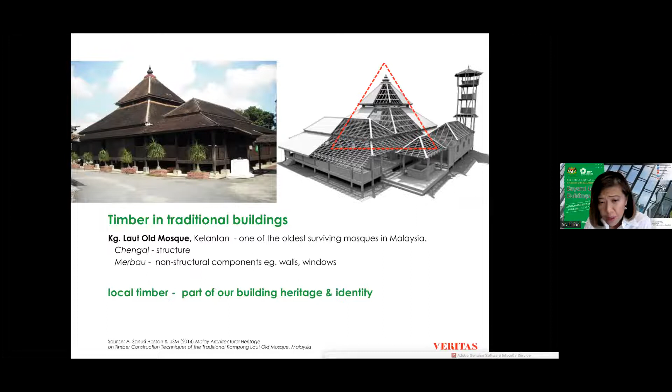So I do believe, and we all know, that local timber is very much part of our building heritage, something we're all very familiar with. We remember those timber walls, those timber louvers that we grew up with, and it's so much part of our identity and heritage.

So continuing the journey, I would like to share some of our own learning from, as I think Najwa said, my 30 plus years of practice in Malaysia, and where it has led us today, some of the issues that I believe need to be addressed, and there's potential to hopefully work with everyone, top down, bottom up, to be able to do more towards combating climate change. I would like to start with some very early buildings, I suppose, to show that it's not really new, but perhaps it's only now that we are more consciously quantifying what we call green buildings.

In early 1999, we had the opportunity to be part of the building of Putrajaya. It was a very exciting time in the late 1990s, and we had a chance to build the temporary bus and taxi terminal, which I show because it's a building that hardly consumes any energy at all. It's totally a simple shelter that is very much connected to the outdoors and yet sheltered from the elements.

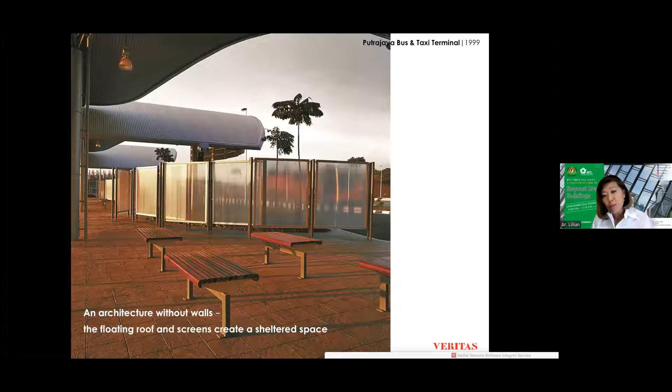So this is the very sort of basic of sustainable building design, where we have an architecture without walls, and we rely on the natural climate around us to provide the comfort and the shelter. Here is just a simple building with floating roofs and a lot of rain screens to deal with what is a very challenging aspect of our climate. It's not just the heat, but it's sheltering from our seasonal heavy rains. That is a big challenge to how we design for the tropical climate.

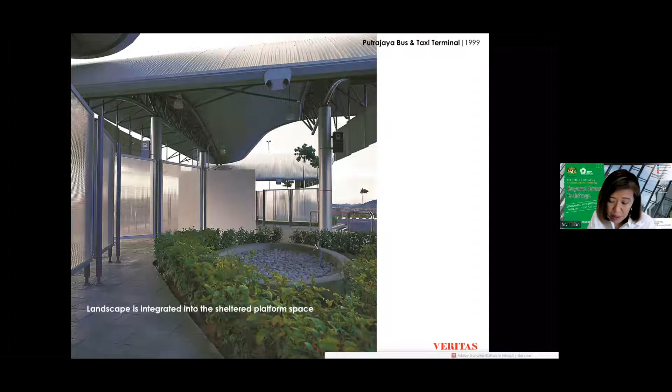And even in a bus station building, way back then, 30 years ago, we aspired to already bring the landscape into the space, a space that you normally associate with the hustle and bustle of a station. We also went on to build the Western Transport Terminal, which today is known as Putrajaya Sentral, where the KLIA Express goes through. And we worked again trying to ensure that it is a naturally ventilated building. So the whole complex actually is naturally ventilated. Only the internalized edifices are air conditioned.

So it's very early on that it's almost intuitive to build without a reliance on air conditioning, because in the tropics, we really do not need to keep the interior enclosed and protected from the outdoors. So we must be very well aware that there is actually no need to have a closed environment in most of our spaces, particularly in public buildings.

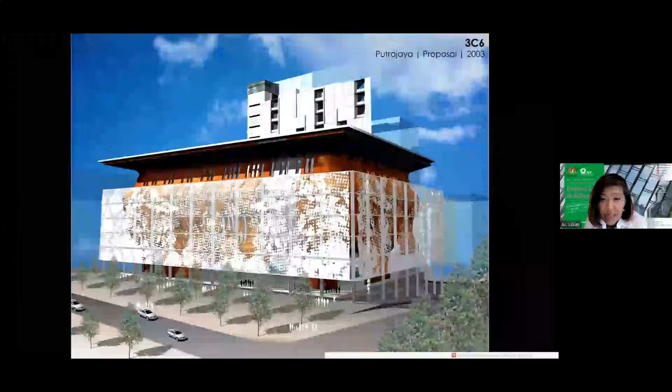Okay, I wanted to show this project that never happened because it was one of the earliest buildings that we tried very much to celebrate the use of local timber. This is an office building with some commercial retail in the core island of Putrajaya. We never had a chance to build it, unfortunately. I wish we did. But right then we already tried to celebrate one of the very precious and valuable resources that we have, which is tropical timber.

In Putrajaya, you're all aware that they have very strict urban design guidelines that require you to build arcades around buildings to allow people to walk in a sheltered arcade from building to building. And we wanted to embed in those standard urban design something that will make that connection to our culture or cultural traditions, local materials. So this was a scheme that we envisioned would have a layer of timber on the facade, on the podium facade,

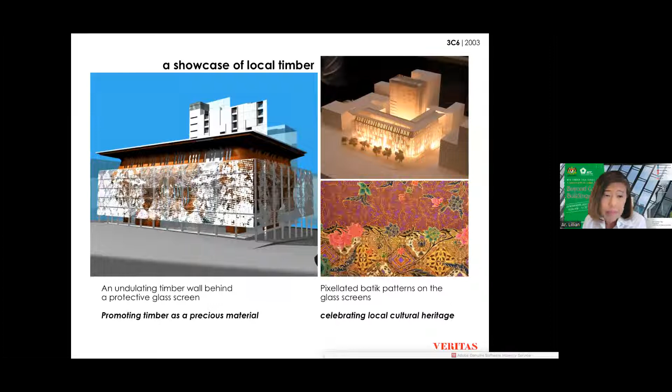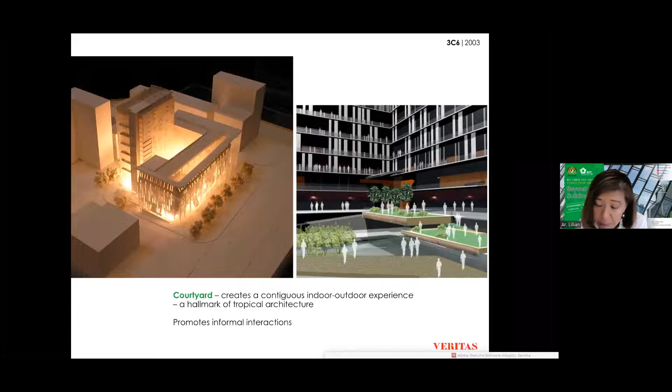but in front of it there is a fritted glass screen. It's a pixelated pattern that we derived from typical batik motifs. So when you're further away, you see the motif very clear. Of course, the screen helps to shelter the arcade from the rain and provides some amount of protection also from the sun. Unfortunately, we didn't have a chance to build it. And I'm still looking for an opportunity one day to have something like that, because this was on the main Core Island Boulevard, which we thought was an appropriate place to celebrate batik, which is one of our very precious craft traditions.

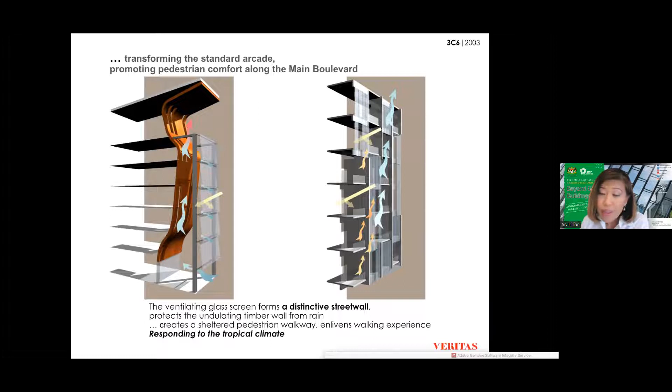Okay, this is how it could work. A layer of timber on the inner part. We were well aware that timber deteriorates with exposure to moisture and to rain. So the glass screen is placed so as to protect the timber and increase its longevity, so it would be accepted as a good outdoor or semi-outdoor building material. I can tell you it's very, very difficult to convince a client to put timber on the outdoors, because we've been trying since then, and there are only a few buildings that we have successfully done that.

Okay, so one of them, to the credit of our clients at Putrajaya, is the Ministry of Natural Resources. And it being the Ministry of Natural Resources, naturally we wanted to use natural materials that are sourced locally. So we were very determined to be able to showcase some of the very viable building materials that have been underutilized, underappreciated, or maybe even feared to be used. So we started by at least trying to bring it onto the podium level as movable screens around the podium of the building.

Most of our work in Putrajaya has an intention to try to make the city more walkable. Putrajaya was conceived as a garden city, and of course, we probably had hoped that we would be walking more around in Putrajaya. And that's why the urban design guidelines have very strict and very extensive requirements for providing pedestrian ways around buildings. But we felt that there were issues of scale that make it more difficult for a person to walk around because the blocks were large.

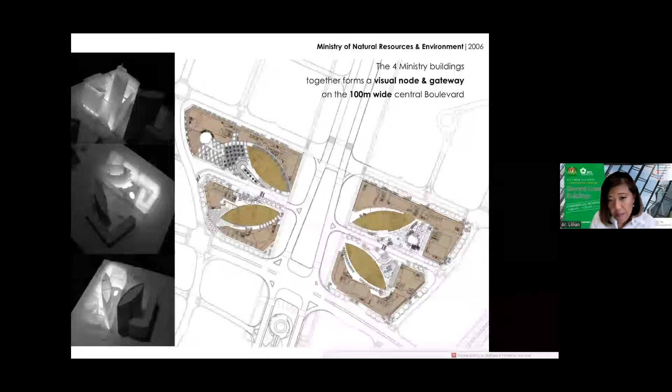a lot more walkable. So we proposed it, and the client took the initiative to extend that concept to the buildings around it so that you create a whole precinct that's quite walkable between all these ministry buildings. So all the buildings, even though done by other architects, followed this master plan concept of carving an indoor street to facilitate the people in the buildings to walk a lot more to other buildings around it.

And we also externalize all the corridors which would otherwise be in the office space, and that usually amounts to 10%. We sort of externalize them out so that there is a lot of activity around the atrium that is created by the indoor street. So you will find this condition in the few ministry buildings that are clustered around in Precinct 4.

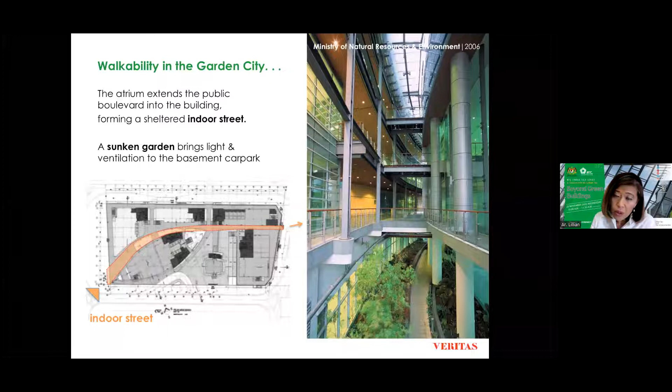And this building was actually completed in around 2003, I recall, 2004 maybe, or 2006, yeah. So you will find that you will be walking through indoor streets, which are also landscaped, in all the 4 buildings in that cluster.

Even back then, in the year 2001, when we worked on the design, we were already doing analysis of the sun shading, tracing the movement of the sun, and looking at the thermal performance of the building envelope to start to quantify the building to ensure that it is energy efficient. And at that time, we had a lot less software, and it was really not easy to do, but we were able to make a start on calculating the BEI of buildings even back then. That's 20 years ago.

And the buildings in this cluster, all 4 of them, actually have a very good energy performance from the orientation of the building and from the treatment of the facade. And we had actually calculated that the energy consumption, the BEI as we know it more familiarly today, is around 136 kilowatt hours per meter square per year, which at that time we considered quite good. Of course, today the buildings that we can achieve are half of that, which is an amazing step from over 20 years ago.

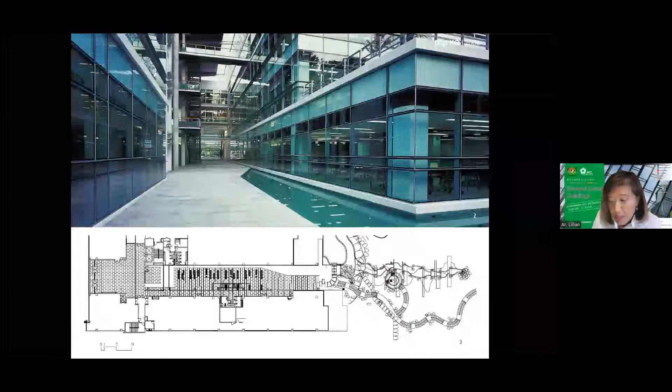It was a bit harder to achieve that in the other building because, being government civil servants, they were probably less inclined to indulge in what the younger people at Digi did. They actually built a cafe around there, and the space was highly utilized for informal interactions. We also took the opportunity, as you can see, to again use local timber selectively, as always, on the underside of the main atrium to give it warmth.

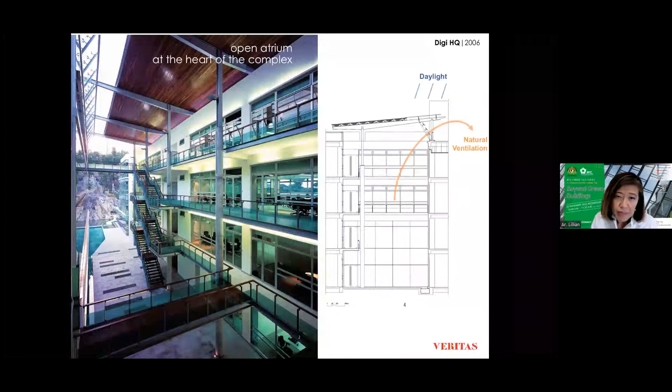So timber is really an amazing building material. And while it is very costly and harder to use as a structural element, it lends so much to a building in terms of giving it life and warmth. And people naturally gravitate to places that have that warmth and welcoming feel. These pictures we took without anybody in it, but usually it's quite filled with people, as you can see. And again, this is a naturally ventilated space.

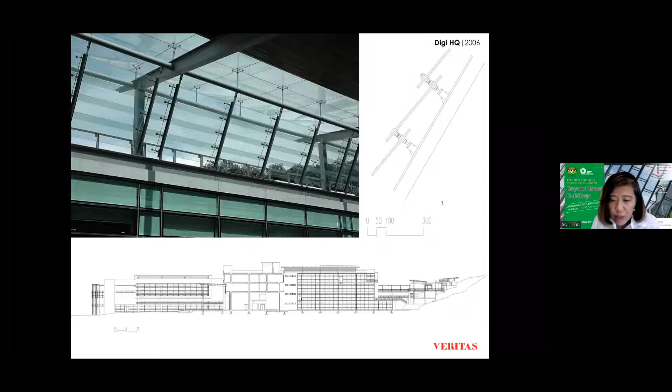I mean, they have all the air-conditioned space, but people actually like to be in the naturally ventilated space. So all the basic ingredients that we need to do sustainable buildings are actually there. It's just a matter of getting out of that mindset that you have to enclose a building, something that we probably inherited from the West or the North, and something that we should always try to steer away from with respect to our local climate.

This is a building that we did also around that time, completed in 2006. It's a typical corporate office building, and unlike Digi, we don't know who's going to stay in there even when it's finished. It's actually at KL Sentral. But again, we tried to use timber on the building facade, and this is what we were able to achieve. We were able to put up a timber sunshade screen that goes up about 30 stories of this 35-story building, excluding the podium.

So we were quite happy that we had a client who, I wouldn't say took a risk, but who dared to do something different from the norm. Again, we are well aware that applying timber on a tall building, it would be even more exposed to the natural elements, the rain and the sun. So we took care to ensure that the timber will be protected.

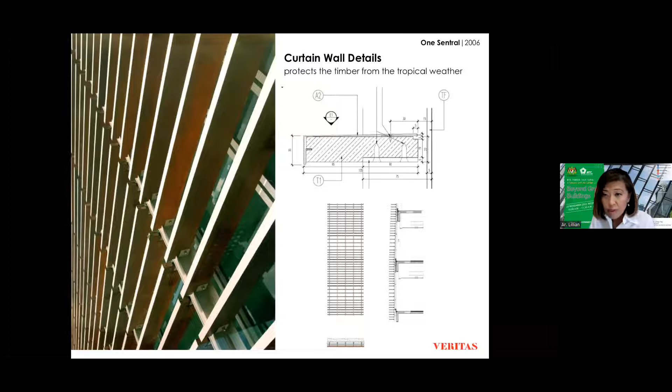So I do believe we were able to successfully achieve the utilization of local Malaysian timber on a high-rise building. That was something we really wanted to do, and we thank our clients at MRCB then for supporting our effort.

This was one client that believed in the informal and perhaps unplanned meeting of people and meeting of minds, what he called the bump factor. His gauge of the building was to ensure the people who work in this company would have a lot of opportunity to bump into each other and be able to talk informally and come up with great ideas in these unplanned interactions.

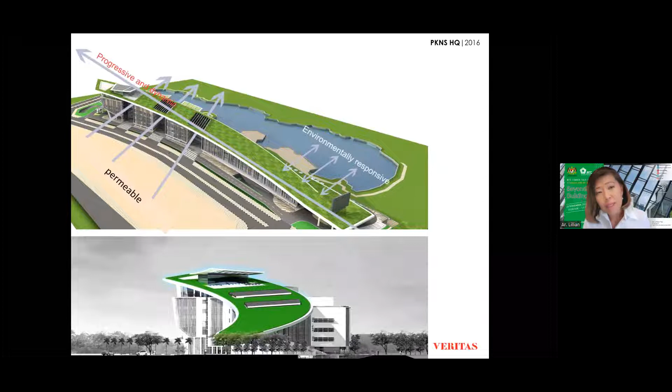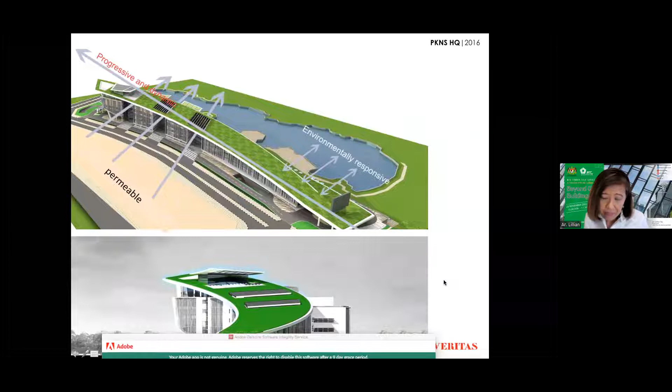but a low-rise building that hugged the ground and actually aspired to replenish its own footprint and to create a park to make up for that loss of green area from its own footprint. As it turned out, part of it then was converted to PV cells, but the total area we consider a good replacement of the footprint that the building occupied. So that's the part that climbs up the building, and then the addition of the PV cells.

Okay, that's how the park looks like. And the other aspect which we felt was very important, besides the numbers, was that we wanted the building to maintain the continuity of the urban pathways from the city to the left side back to the lake, so that people in the city can still filter through the building, and the building is not a barrier to people enjoying the green area, the public green area beyond the building.

2012, we did this building, which is Menara Binjai, again, another opportunity to test another aspect of a green building design. We actually started the building before the GBI was created. So we had actually started with the Green Mark, the Singapore Green Mark by the Singapore BCA. And when the GBI came up, we then also applied for it at the same time. The building is certified Green Mark Gold, but only GBI certified.

And we understand that because the criteria are different, the Green Mark being with a greater emphasis on energy, low energy performance criteria, and less on other factors. So it being quite an efficient energy building scored higher, but perhaps in GBI, there are a lot more areas that you need to score the points literally. So it scored a little bit less. And this is something that you will see, the difference in different ratings. Nevertheless, it's still a very good performance of 150 kilowatt hour per meter square per year.

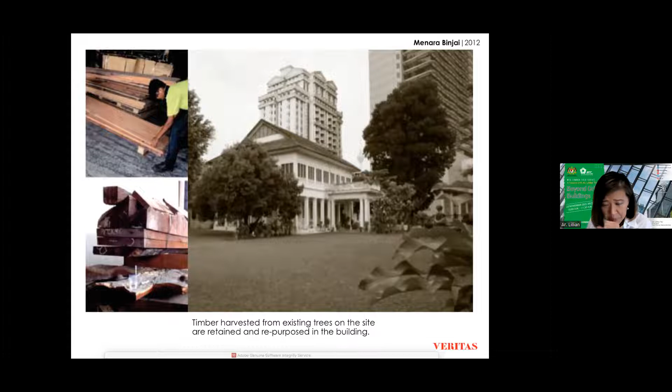Oh, I forgot to mention that this building was actually built on the site of an old colonial bungalow, and we had actually kept all the trees. We actually kept the trees for about 3 years before we were ready to put them on the building. The contractor was about to charge us a rental because he said this had been sitting here in his warehouse for a long time. But the client luckily was also committed to it. So we salvaged every tree that was on the premises and used them as much as we can in the building. Of course, it's not enough to do what we did in the earlier building, but we used them internally. Also, it was a species we were a little less familiar with. I think it was some African species that were planted there long ago. So we used most of it in a sheltered area, in the lift cars and in the main reception lobby, and some of it in the sunshade fins that are on the roof garden.

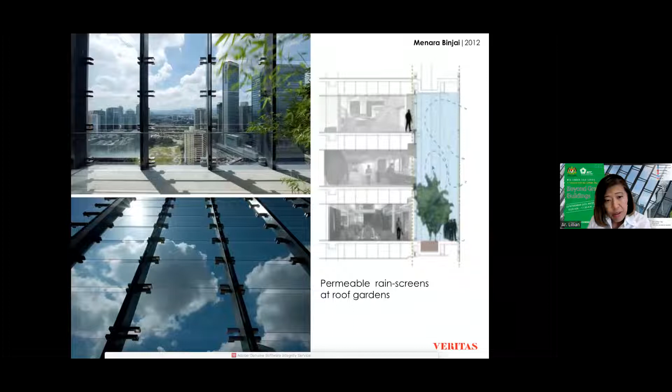Here's a view of what it's like behind the permeable breathable wall that we created on every 3 floors where the verandas are. This is one of them where the tenant even took the effort to put in a timber deck to make it feel a little bit more outdoors. And this is the urban veranda, we call it, which is the roof garden that can actually be utilized by anyone in the building.

So this is our way to just lend a bit of the life that we can have living in a tropical environment, and not to be in a fully closed building. You know, I spent quite a few years living and working in New York, where everything is so enclosed. So to me, it's very special that we have the privilege, if we took it, to create outdoor spaces to relieve the sort of closed hermetic office environment.

Another building that we had done, which also is GBI Gold and Green re-rated, is the Menara Etika in Jalan Bangsar. Here, while we were not able to bring the garden up the building, we were at least able to use it to relieve the typical dreary podium facade.

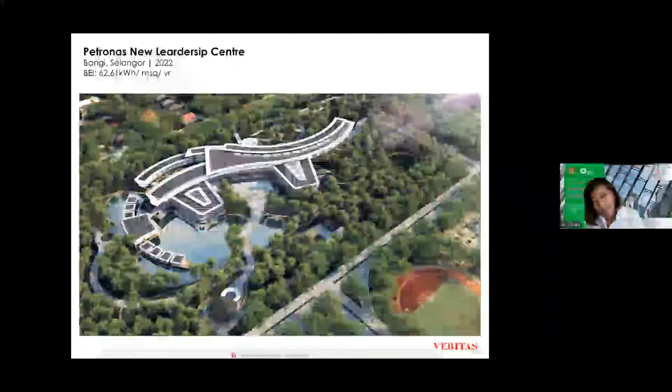Another building that we just recently completed, which is LEED Platinum and GBI Platinum, has the lowest that we've achieved, which is around 62, and that's without counting the PV cells. With the PV cells, it actually can achieve around 57 kilowatt hour per meter square per year, which is quite a stretch from where we started 15, 20 years ago. So that's the buildings that are rated green.

But you will find that most architects may not be able to have clients who want to go for rating, and you wouldn't be able to quantify so accurately your performance of the building. And there are many such buildings, but we believe that one should still strive to achieve some amount of sustainable performance, albeit not quantified and certified.

This is the Star Residence, which is 3 towers in KLCC. But besides the building, which is quite standard already, and we know what to do on selecting the glass and orienting the building, our attention in the city center turned to what we feel is another equally important aspect of sustainable design: the relationship of the building to the street, and to do its part to improve the quality of the sidewalks, the quality of the street, and in doing so, to encourage more people to walk and facilitate the walkability that we need so much in our city center,

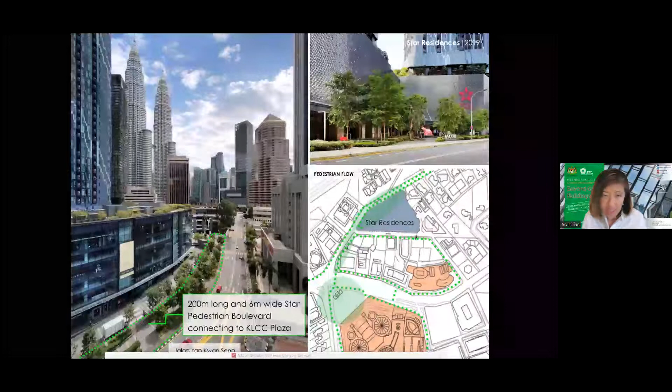Because it's actually not that far. I have walked this many times because I have often got out of my car. Our office used to be at the corner of Jalan Ampang. I have many times got out of my car and walked the rest of the way because it takes only 10 minutes actually to walk from Jalan Tun Razak to Jalan Ampang along this stretch. But it's something that people tend not to do because of the hazards that you may face in the sidewalk as it is now. But hopefully, within the next 10 years, as other buildings develop, the whole sidewalk environment will be much improved.

And to me, this is quite important, that every team of architects and engineers, when they see the chance, not have this island thinking, because sustainability cannot be an island all within the building, but needs to extend and be more holistic, to engage the streets, to engage the entire urban public realm, to make our cities more livable and more walkable.

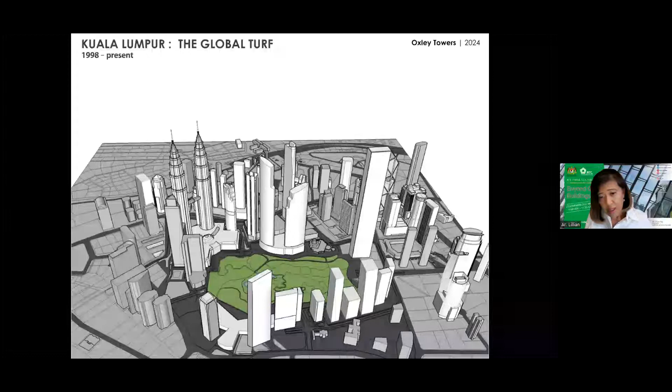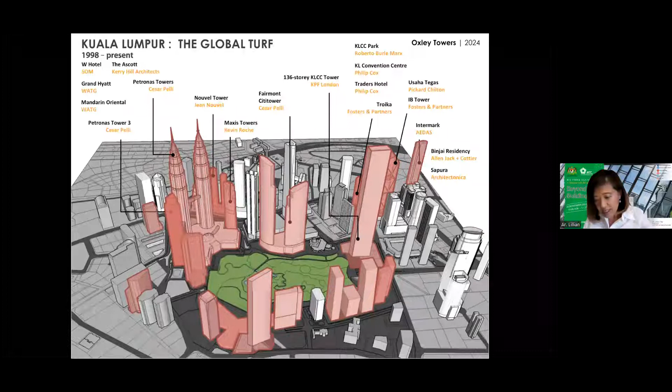But we never had a chance really to build in this place for a long time. I always like to show this because it is really hard to have an opportunity to build here. You've got Petronas Towers and all these famous architects from all over the world. Cesar Pelli, Norman Foster, SOM, everybody has been here, Philip Cox, AEDAS. So we were wondering when we'd get a chance, because it's actually right at the front door of our office, which is across the road. But one day, after 20 years of looking at it, we had the opportunity to have a client with the good faith to engage us to do a building here, surrounded by all these international architects.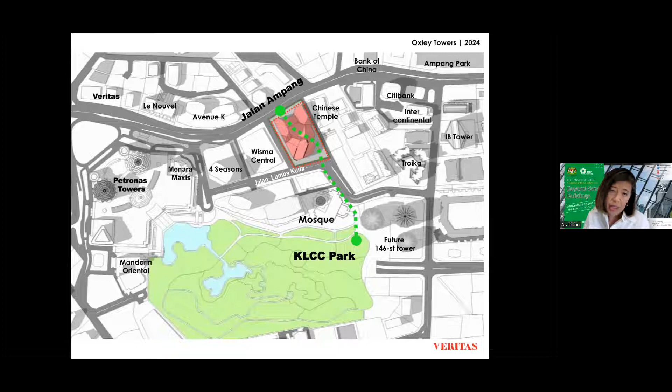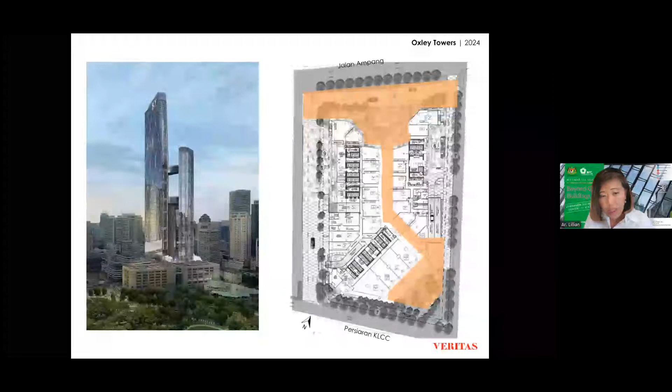And the first thing that we wanted to do, not so much to create an iconic building, was to address the walkability issue and create a path through the building to get to the park, because there are not that many routes to the park. So we wanted to set the example that every building should be more permeable to allow people from the other side to get access, and in fact sheltered access to get to the park.

In the park there is also the mosque, and there are a lot of people walking around to get to the park and the mosque every Friday. So there's a lot of foot traffic, and I think every building can do that bit to provide and enhance the walkways around there. But I don't need to show that. I think I'll skip all that. This is just the motifs that we carried.

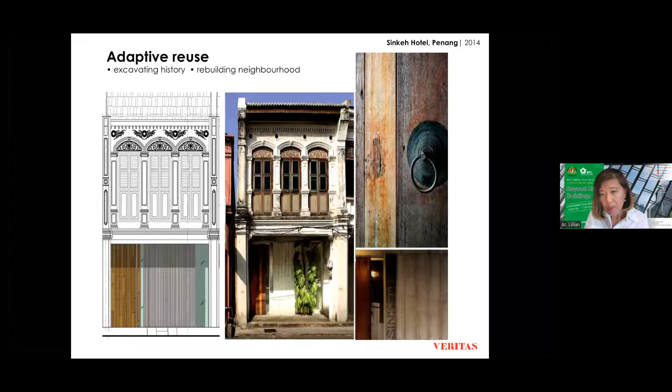This is a small project that we did in Penang quite a while back. And again, we just tried to retain as much. Even though it's not in the core heritage zone, which is highly controlled, we opted to keep quite a few of the old elements in the building, but insert new elements that were sympathetic to it. One of the things we wanted to do was to again bring light back into the shop house. And I think this is all part of sustainability.

It's a project that's small. You wouldn't have consultants to calculate the energy consumption and assist the design team. So a lot of it's intuitive, and what we wanted to do and were able to achieve is to bring light and ventilation back into a lot of shop houses that had been closed up to create more area, to create more protection from rain.

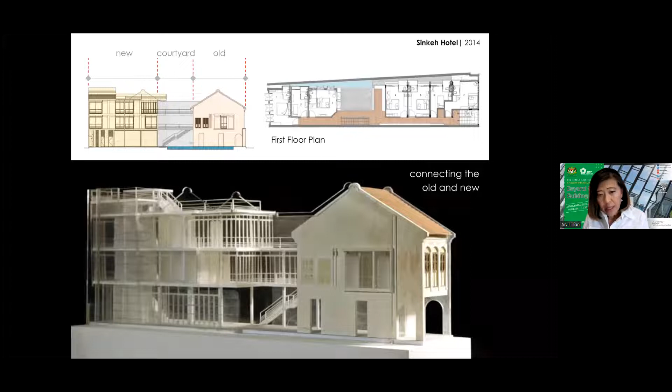And this is one example where we opened up, we took away all the roof covers that were built over the years. This building is actually from the 1910s. And so it's a matter of removal of the things that were obstructing a more sustainable quality of environment inside the shop houses. So it is sometimes a matter of reduction rather than building to make.

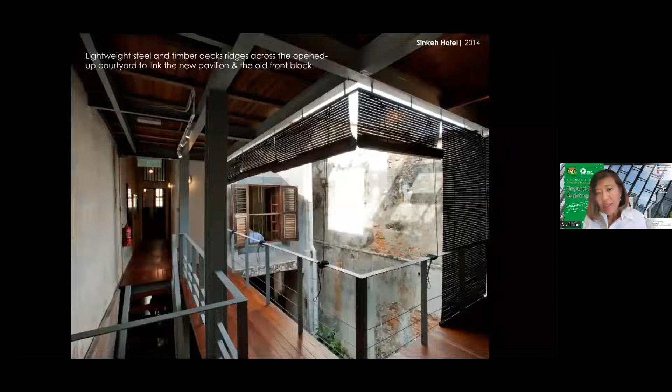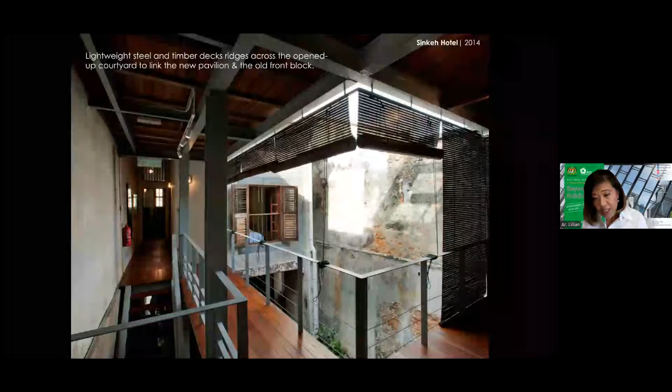Again, we use timber because in this building in Penang, we wanted to recall some things that are dear to our memory of Penang, like the clan jetties along the coast of Penang. So the corridors are treated like floating jetties to the rooms. And we're very glad that we were able to do something which I think has been lost from many shop houses, which is to bring in natural daylight and natural ventilation into every room in this one lot hotel.

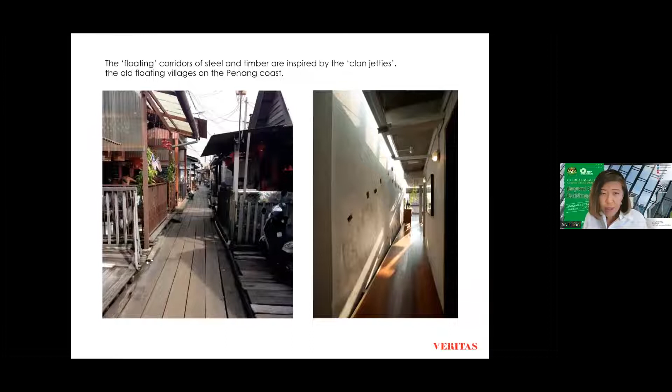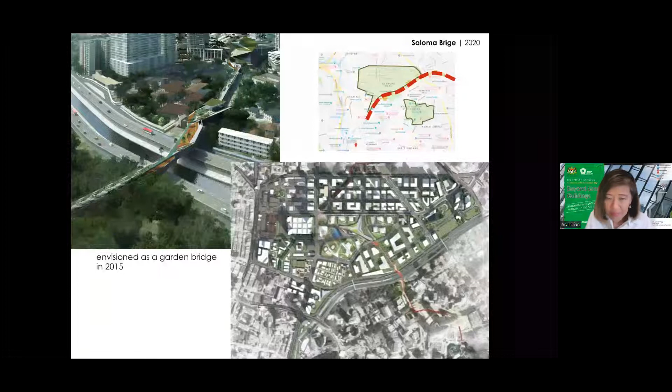And the importance of it is, again, not its iconic impact, whether you like it or not. The most important thing to us for this project is the connectivity it created for pedestrians between the precinct of KLCC and Kampong Bharu, which was separated not just by the river, but by the placement of the AKLEH Highway, I think in the early 80s or late 70s, when traffic was very bad in KL, and it was the right thing to do then.

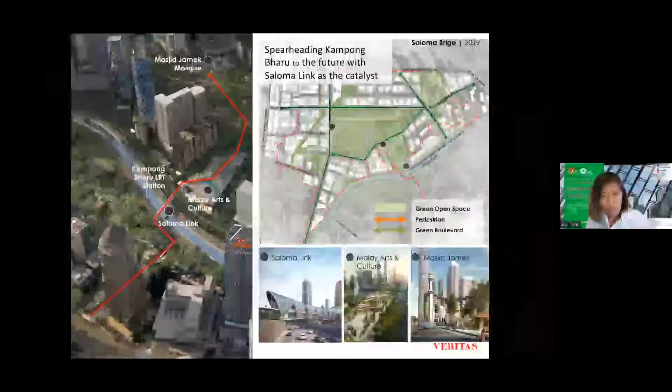But I think it also, at the same time, cut off a very vibrant part of Kuala Lumpur, which is KLCC, from another part of KL which is very precious to all KL people, which is Kampong Bharu. We felt that it would be important to connect this as part of the whole sustainability of the city. And we had the opportunity to do a small master plan for them quite some years back. And this was one of the proposals to make a pedestrian connection between the two very important precincts.

Our client used to call it Antara Dua Darjat, that there are these two different precincts, and we really proposed that the first thing that should be done, no matter what you do to the entire master plan, and there have been many master plans, is to try to restore a link across, because historically, before the highway was there, it did exist.

There were a couple of small wooden bridges that existed from the late 19th century. There was even one quite near to the Muslim cemetery, where the people in the village of Kampong Bharu would carry their deceased across the wooden bridge to the cemetery. So we had this unique opportunity to build a bridge with a budget that they had dedicated to the Perbadanan Kampong Bharu.

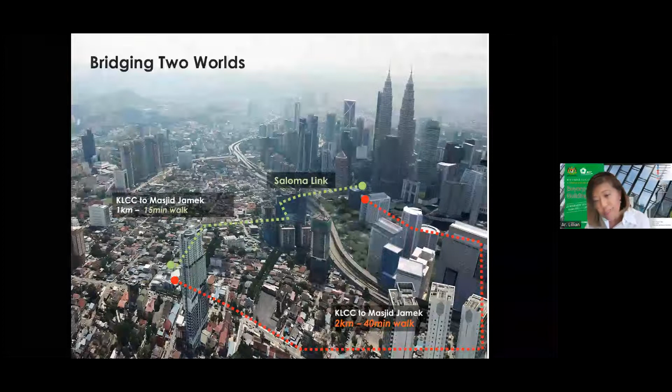With this bridge, you are now able to walk from KLCC to the Masjid Jamek within 10 to 15 minutes, 10 if you're fast, 15 if you're taking your time, taking views, taking shots of KLCC. A walk which would otherwise be 30, 40 minutes across many busy intersections in the city. So we believe that's the value of the link, and that it would be a catalyst towards more development on that side of Kampong Bharu.

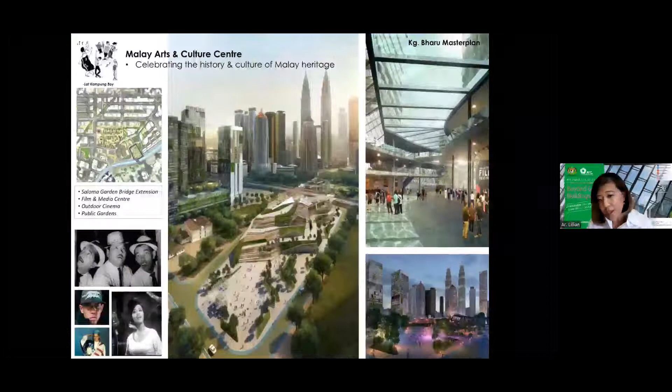There have been many, so I will not go into the details of that. And I would lastly just want to end on one point about other opportunities to make our cities, our buildings and our streets more sustainable. After the pandemic, buildings take a long time to do. This project was started in 2009, due to finish by early next year. So that's a whole 12, 13 years to deliver a building. And it so happened that this building was half constructed during the pandemic and would run its course to finish after that.

We felt that after the pandemic, there is a change of values, a change of needs that we should recognize. Buildings take a long time, and it's really hard to change anything because of the nature of the SPA that the developer signs with the purchasers. There are about 1,500 units here, and there are also 30 sky gardens. When we got back to work after the pandemic, the first thing we did was to tell the client, I think we should change some of these sky gardens. There are 30 of them, 10 in each tower, so that you don't need to walk more than 2 floors to get to a garden area in an otherwise very dense development.

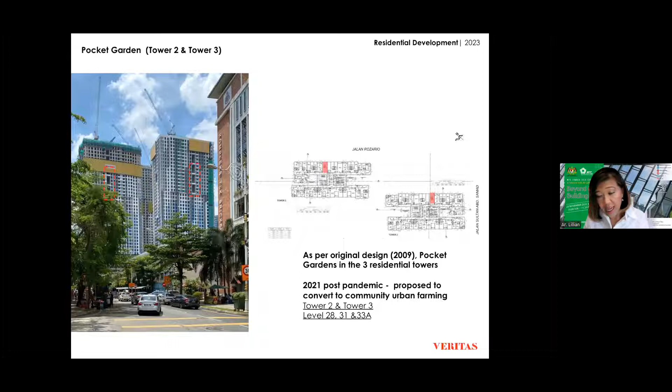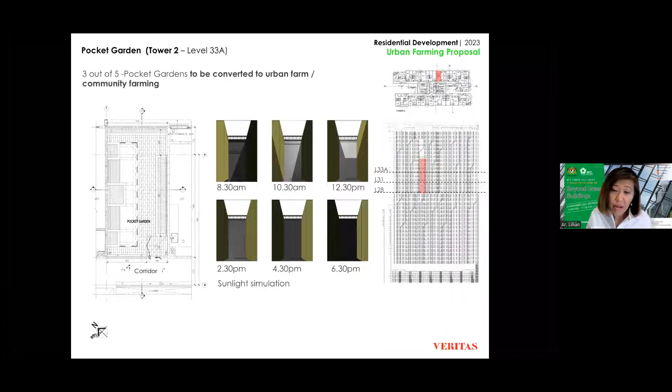We felt that instead of the ornamental gardens that we had, a Balinese garden, herb garden, Japanese garden, we should try to encourage urban farming in the gardens that receive enough sunlight. So we did all the analysis to show which frontages would receive enough daylight and sunlight to sustain some planting, herbs and small fruit trees and some simple vegetables, tomatoes, chilies, things that would give us a lot of pleasure. That's something we probably discovered after the pandemic. And I think this is something that all of us need to contribute to resolve. Because of the SPA, the developer would be very, very reluctant to change anything, even if it seemed to be for the better and arose because of changing conditions, because of what was signed ahead.

So there you are, you only develop a site once. Once, maximum twice. There were low-rise buildings on the site before. But to me, every building is the end game. You're not going to have a chance to build it again if a building is that dense and has that many basements. This one has 2.5 basements. But with most typical buildings with a 5-story basement, you're not likely to be able to safely and economically reconstruct the building like they do in Hong Kong, because they don't have basement car parks there.

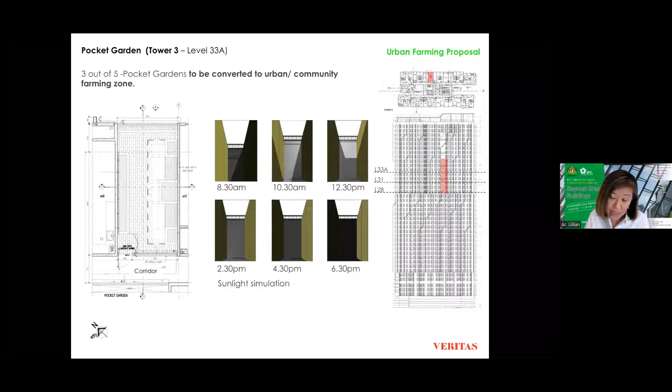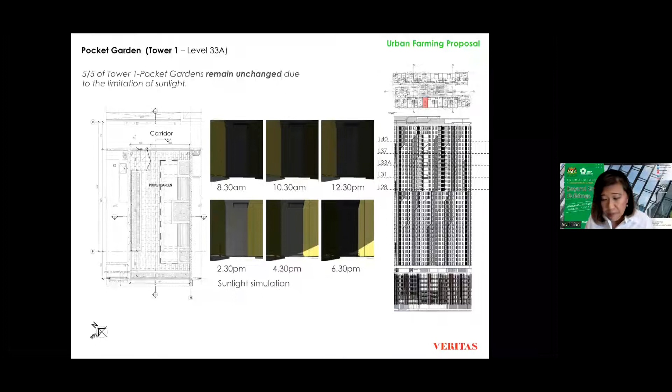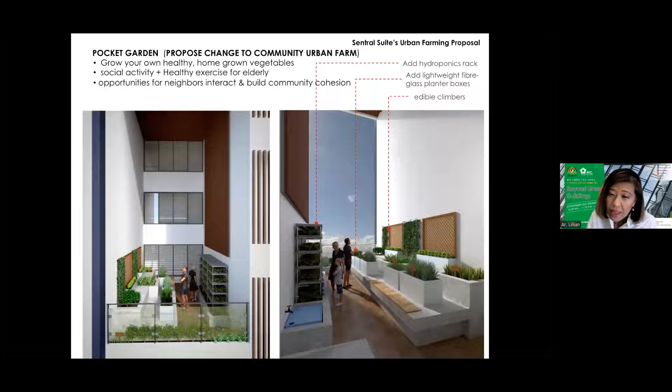So even though we did all the design to convert the landscaping from ornamental landscape to productive urban farming, just because of the obligations, and perhaps the fear of lack of acceptance from the eventual residents in this community, we could not proceed with it. And I find that a great loss of opportunity. So it takes many parties to make things work. In this case, to build more flexibility into this contract so that we are not locked into designing something where, in an unexpected way, like it did happen with the pandemic, the conditions have changed such that there are changes crying out to be done, but we are locked in because of a contract.

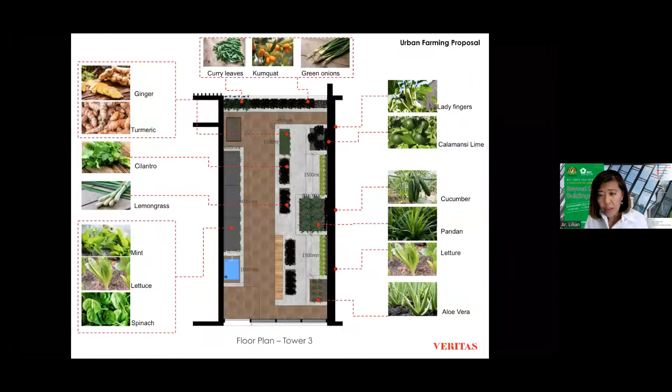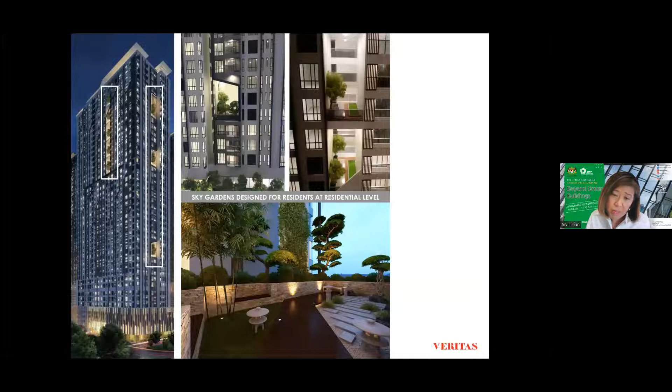So I raised this up because I hope the parties who hear this would perhaps look into that to ensure that there is opportunity to do good changes to buildings, because the gestation period is so long, to make sure that they are updated. I'll skip this.

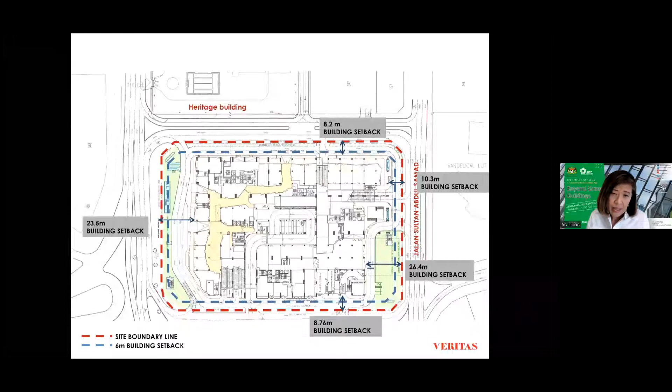This one is an urban park that we did on this building. It's a very dense development, but the building has done its bit to set back 4 times more than the required setback on the front to create an urban plaza, as well as the 30 sky gardens in the development. I will probably end there.

This was the last one I wanted to do, which is also about revisiting planning regulations that are an obstruction to achieving greater level of sustainability and obstacles to improving the quality of our streets and sidewalks and the urban realm. Something like the greening requirements, which are very standardized. You just have to put a ring of green around every building, making it further an island. It's already islanded by the driveway, and now furthermore by another ring of green.

And many times in the city, this ring of green stands in the shadow of tall buildings, so it does not really thrive at all. So I feel it's a lost opportunity again, and that we should be rethinking this policy right away to ensure that whatever green we put into the city is productive, does its part to sequester carbon and not just be ornamental but be productive.

So this is my message to people who can make a difference here, people in planning and our surveyors who are the first parties at the apportioning of land parcels. There are a lot of to-dos. It's not just in the design of buildings, but everyone has a role to play: planners, surveyors, town planners, local authorities, and the clients themselves.

So I hope I've shared my bit. We are all very passionate about timber in our office, and I'm very happy to have the chance and thank the Malaysian Timber Council again for this opportunity to share our journey and experience with trying to promote our wonderful local timber in our industry and in building and construction. Thank you very much.